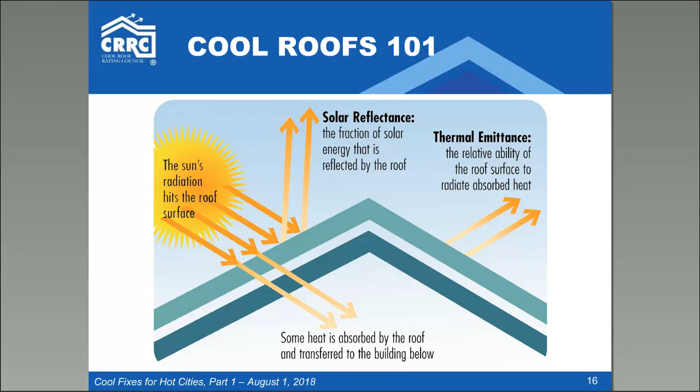And so then we look at the thermal emittance, which is the ability of the material to re-radiate that energy back out into the environment. And so what isn't reflected and what isn't re-emitted back out into the environment, that's the energy that's going to be absorbed by the building. So that's really key that we look at these two properties as a way to evaluate how much of that solar energy is going to be transferred into the building and absorbed by the building, and that's something that you're going to have to address with air conditioning, sort of additional cooling load.

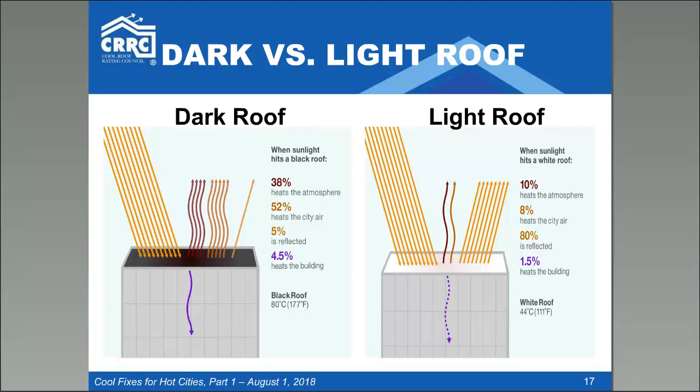So just a couple illustrations of this concept here, just another sort of way of showing the same information. You look at a dark roof, some of that energy is still reflected, but much less than a high reflectance light colored roof. So you still see the same amount of solar energy is coming in, but a lot more of that energy is going to go into the building compared to a light roof where a lot more of that is bounced back off and re-radiated into the environment. And that results in a lower temperature of the roof and then less of that energy that is being transmitted down into the building.

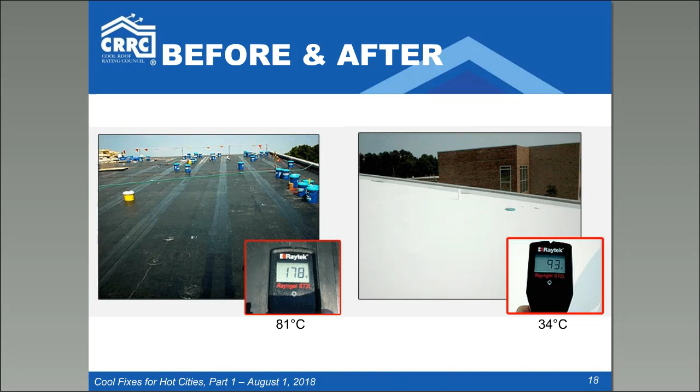And here's just another sort of quick example. This is basically an anecdotal thing, but you can look at the measurements being taken by a thermometer on the roof when it's in construction, and it has a black underlayment, much higher temperature at 178 degrees Fahrenheit or 81 degrees Celsius, and then the finished roof product with the light colored one results in a much lower temperature. You've got 93 degrees or 34 degrees Celsius. I'm actually not sure where the location was of that, but it seems like it's pretty hot given that 93 is the cooler temperature of that building.

So that's just sort of some basics of the properties that we're looking at, but let's talk about the impacts of it. So I mentioned occupant comfort, which is something that, here in America, we might be thinking more about air conditioning. You got your utility bills, you've got the amount of load that's being placed on your electrical grid. But in some parts of the world, people don't have air conditioning, or they are looking to add air conditioning, which is something that strains the development of those countries. So people who live on the top floor of buildings, their apartments might be a lot hotter, and that could have some health impacts as well. So occupant comfort is definitely a key consideration as well.

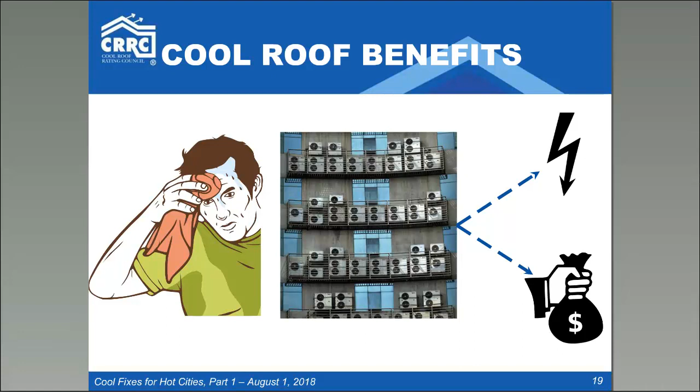But also, like I said, you have air conditioning. If you're running your air conditioning all the time, that's going to be a lot of money for you as the homeowner, and also taxing to the electrical grid of your community.

So that takes us to the urban heat island concept. At its most basic description, the urban environment has a lot more dark surfaces, has a lot more thermal mass, a lot of asphalt and concrete materials that are going to absorb the heat throughout the day. And as that happens, it heats up higher than other environments that might have different surfaces, less development. So you end up with an urban heat island. The urban area gets hotter and it stays hotter. It doesn't cool down as much in the evening. And this has a number of considerations for the local environment.

You have increased pollution happening at those higher temperatures. The reactions that create ground level ozone and smog happen faster and more at the higher temperatures. It's also just sort of less pleasant. If you're in a hot downtown area, you're going to have to be running your air conditioning more than if you're in a less developed area.

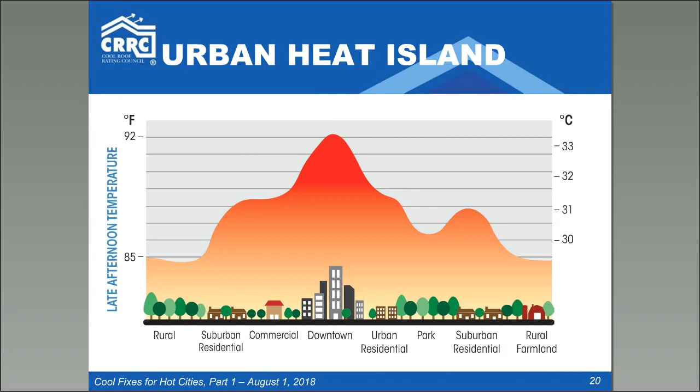And so there's a lot of considerations around the urban heat island, so cool roofs not only impact your building and your energy use and the cost that you're spending on air conditioning, but also have a bigger impact on the community around you.

So I want to actually pivot really quick to talk about something else, which is the winter heating penalty. I think it's pretty well understood that if you live in a hot climate, keeping your building cool is going to be helpful. But what if you live in a more moderate climate? How do you tell if that cool roof is going to be helpful for you in the summer, or are you actually losing out on some energy in the winter? This is a real phenomenon, but I think generally it is overstated. There's basically a couple different reasons why.

In the winter, the sun is lower in the sky, so not as much of that solar energy is making its way through the atmosphere to the building. Also in winter, you've got shorter days, so there's less total sunlight, and depending on where you are, oftentimes winter days have more cloudy or overcast weather, so you're cutting back on the amount of solar energy. And lastly, if it snows, you already have a white roof, so the color of the roof underneath basically doesn't matter anymore.

So all this is to say that in the summer, you're going to have some gains from keeping your building cooler. And in the winter, you might have to heat your building a little bit more than you would with a traditional dark roof. But the relative difference is much different. The gains in the summer are much more than what you're losing out on in the winter, because there's not as much solar energy getting absorbed by your building in the winter as what you're avoiding in the summer. My rule of thumb is if you use air conditioning, then you'll probably benefit from a cool roof. But that's just a quick rule of thumb. Obviously, there's a lot of variables that go into your location and the type of building that you have.

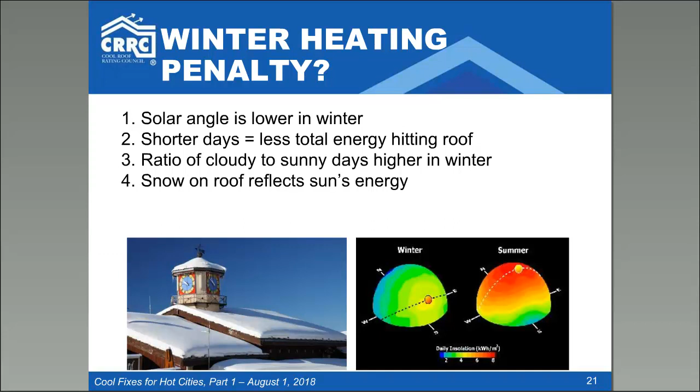I think this is an important concept because it helps people understand that cool roofs are beneficial in a lot of different climates. It's not just the San Antonio area, which we'll be talking about today, but there's a lot of other areas of the country where cool roofs can still be beneficial.

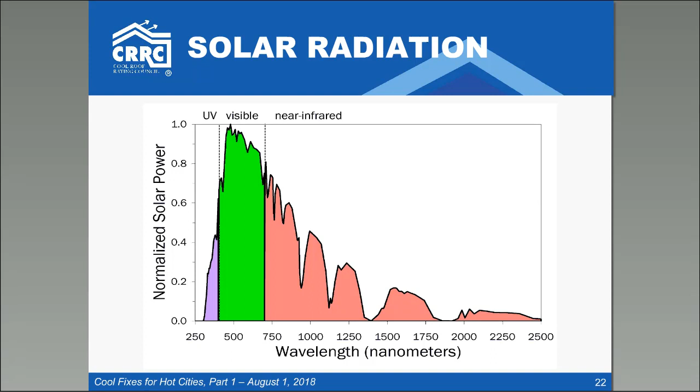So don't get overwhelmed by the science here. I just want to give a quick illustration of the solar spectrum. You've got visible light here in the green, and then you've got the UV light and the infrared spectrum on either side of that. This is just a graph of some material that's reflecting energy in different ways. The reason I want to understand this is because this really gets into some of the interesting things happening with cool roofs.

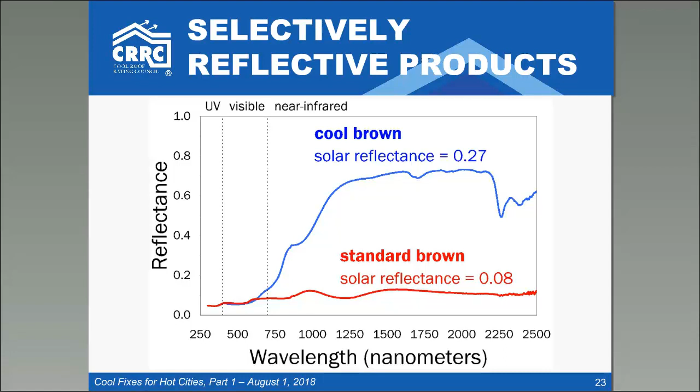So you're not going to be able to see any difference. Obviously, there's a little bit here at the tail end of the visible light spectrum that's maybe a little different. But it's basically going to be the same color as the standard brown, but much more effective at reflecting that solar energy. So that's really interesting, that cool roofs don't just have to be white. There's a lot of different options for cool products using technologies like this. And just to further that illustration, here are some examples of different materials that have been coated.

So in this case, the R is the solar reflectance value. So you can see that the black is 0.04. So these numbers would go from 0 to 1 as sort of a ratio of how much of that energy is being reflected. So a standard black is 0.04. That's pretty close to 0. But a cool black is actually 0.41. So that's almost 40% of that solar energy being reflected back off.

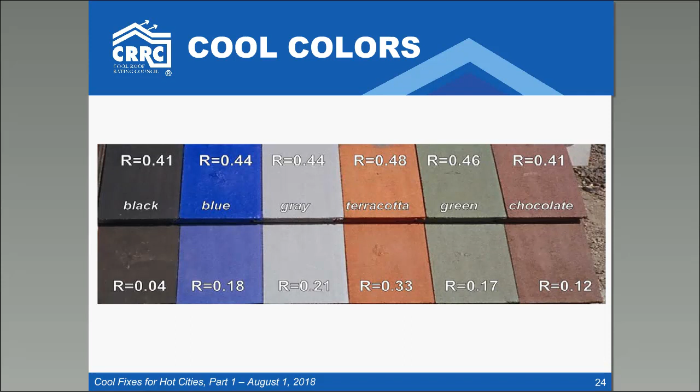And it looks more or less the same. You can see a little bit of color difference, but fairly close. So that's an interesting way of demonstrating the power of cool colors and technology to keep buildings cool while not sacrificing on the aesthetics of your building.

So in the next few minutes, I want to briefly talk about the CRRC rating program. As I mentioned, the ratings are a key component of our organization. We take samples of materials, have them measured for their initial values, and then we put them out on weathering farms in 3 different climate zones around the United States: Ohio, Arizona, and Florida. After 3 years, we bring those back and measure them again to get the 3-year weathered value.

And so that's more representative of how that roof will perform over time, right? How the roof performs at the beginning is nice to know, but your roof is going to be on your house for 10, 15, 20, 50 years. So being able to understand how it performs over time is going to be more useful for your benefit. So we definitely want to have those 3-year values in addition to the initial ratings.

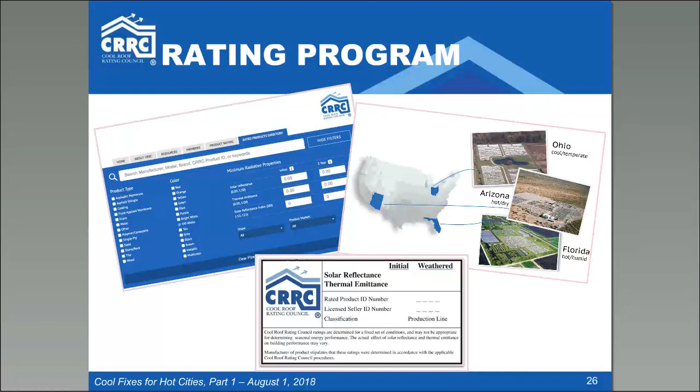And then we provide labels for those products so they can be clearly identified as being part of the program. And then we post all the information on our online directory. So if you go to coolroofs.org/directory, you can go straight to our site that has about 3,000 different products, and you can filter and sort through them. So I'll just jump into that here.

So you can sort by product type, you can sort by color, and you can also specify a minimum value that you're looking for in solar reflectance or thermal emittance. And that can be useful in determining compliance with specific programs or local codes.

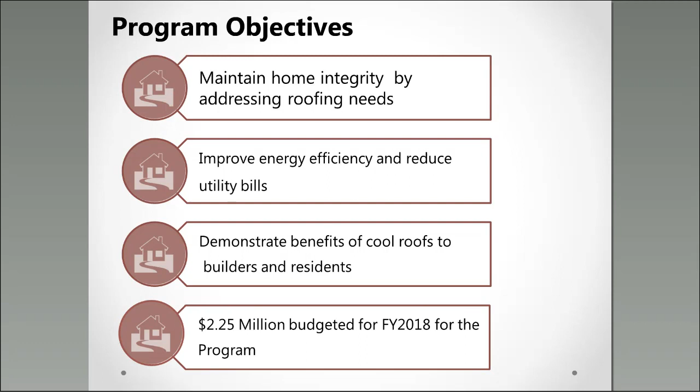One that I want to mention that we recently learned about having high reflectance roofs and creating a home that's comfortable: we received information about the fact that a cooler home actually helps to lower domestic violence rates. So the benefits keep layering on and on with doing and building homes in the most efficient and proper way.

So as a city official, as somebody that's looking to try to find a way to provide quality of life and improve the situation for many folks in San Antonio, this is something that's very important to me. And you can see that what we're trying to do is educate folks throughout San Antonio and anywhere in South Texas, all over the South for that matter, about this benefit.

So I would want to also point out that I'm very thankful to have a city staff that has been very, very cooperative in helping to establish this program. When we started the program, we started with only $200,000. That $200,000 got us 11 roofs, basically just to get it off the ground and to prove this as a pilot program.

We know that once we can demonstrate the program through real projects, we can show those benefits to the rest of the city. And so this program has grown from just my council district, which is the center part of San Antonio, all throughout the city of San Antonio now.

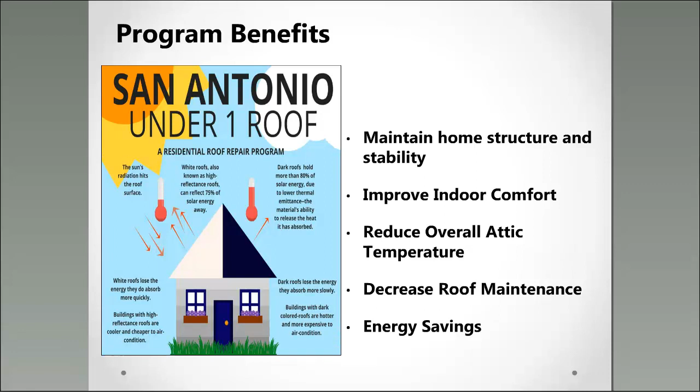So again, this is just something that we think is an important part of what not only San Antonio is going through, but many cities are going through. And at the heart of this is we know cities have to find ways to create and administer programs that can help their communities much quicker and more effectively than state or federal government can. So with that, I want to hand off to Barbara Ankamah. She's going to speak a little bit about the program.

Thank you, Councilman Treviño. We in Neighborhood and Housing Services share in Councilman Treviño's excitement about the program. When the discussion came up about funding this program, we quickly got together as a team to really talk about, okay, how are we going to qualify people? How are we going to market this program and really make sure that we expended all the funding that he secured through our general fund to deliver this really great benefit to our residents?

But the really unique thing about the Under One Roof program: we receive CDBG and HOME funds to do owner-occupied rehab, so a lot of our focus is addressing the whole house. And this is very singular in focus with addressing the roof, but a really neat piece to this is it allows us to help clients that otherwise most likely would not be helped through our other programs because they may be over income or may not meet those federal requirements.

Councilman Treviño, one thing that he really stressed is, look, I want to help our veterans, I want to help our seniors, and so we have made it a point to definitely target those areas that we know veterans, seniors, people that meet the qualifications for this program are at.

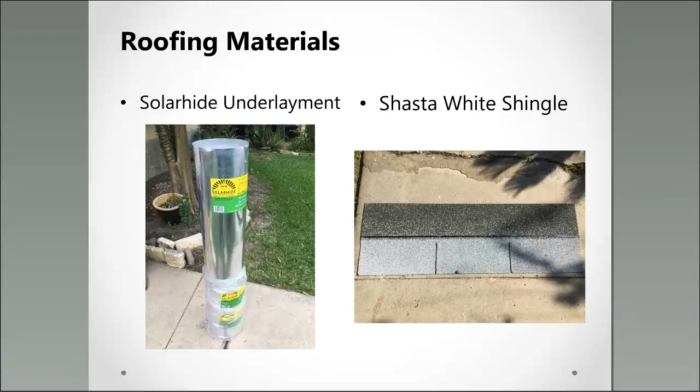So the roofing materials, we're using a Solarhide underlayment in addition with the Shasta white shingle. So when you drive through some of the neighborhoods, especially when we initially started in District 1, we had some targeted neighborhoods, and we really did work to cluster the homes that we're assisting and doing our best to qualify people in close proximity. So we have some streets that have 4 or 5 homes that we've done. Might be spaced apart, but you can clearly see those white roofs, and so we're quite proud of that. Makes for a good tour to really point out those roofs and see the benefit at work.

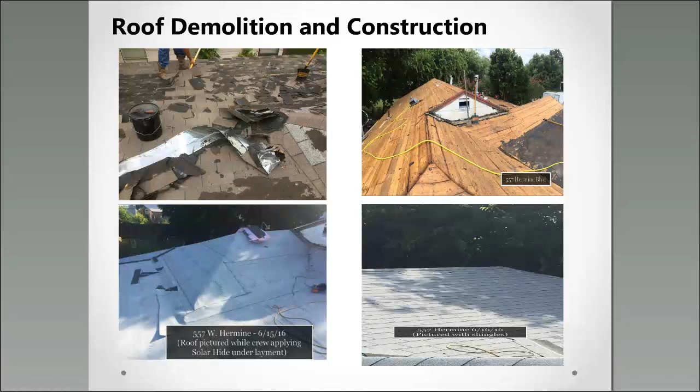We've got a size requirement. The home cannot exceed 1,500 square feet. We have exceeded that. That just was to sustain some sort of efficiency with costs. Again, as we moved out into other districts, we encountered some districts have larger, older homes, and so we did accommodate for those requests. We didn't want to turn people down.

Our timeline, we're aggressive because, again, this year our goal was to spend $2.25 million, and we're almost there. So as you see in those first and second quarters, we completed 85 roofs, third quarter 42, and fourth it states 5, but since this presentation was handed in, we've got 9 more additional roofs that have been completed. So we have an aggressive performance measure to complete 161 roofs for this program. We're at 141 to date.

Our challenges. So initially when this program started, residents really didn't believe they were going to receive a free roof, let alone an energy efficient roof. So we would get one person, we would do their house, and then quickly be accosted by the neighbor saying, well, why aren't you fixing my roof? Well, we block walked, we handed out flyers, and then they admitted, I really didn't believe it was real. I just thought, oh, there's a gimmick to it. I surely owe something. But again, this is granted to the homeowner.

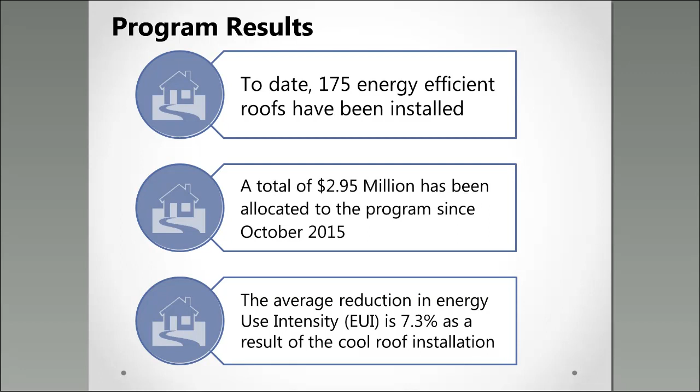So program results. Here it states 175, but we are actually now up to 184. A total of $2.95 million has been allocated to the program since its inception in October of 2015, and the average reduction in energy use intensity is 7.3% as a result of the cool roof. So it really has been so beneficial and so great. It's a great piece to talk about when we talk about housing programs. It gives us more options to assist our residents, which makes us highly excited and happy.

And I just forwarded a little too fast. But here are some before and after pictures of 2 homes that we did initially when we started, and you can see that bright gleaming white roof. And they're all happy residents.

I want to also mention that, as this program evolves, we're always looking to improve. It's been maybe a year now that we had a really, really bad storm hit us, and roofs were damaged. And so one thing, we don't require people to have homeowners insurance, because sometimes that is a lot for people to afford. So if you don't have it, that doesn't eliminate you from receiving the assistance. But if you do, we get copies, and we make sure, if people have filed claims, that's well documented. And again, it's just protection.

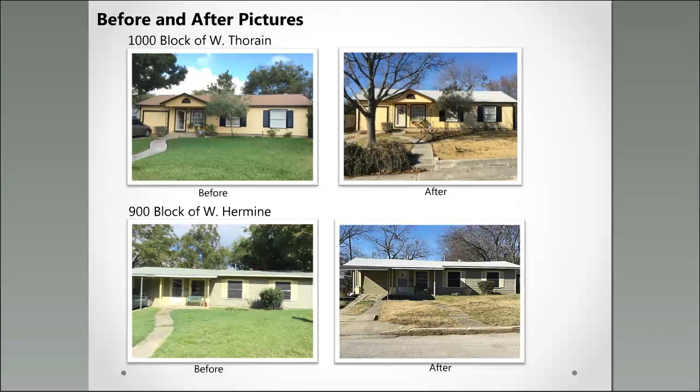We don't want those that may have the means to address their roof taking advantage. So we've got some things in place to just make sure we're helping those who need the help and the assistance. And again, if you look at the houses that we're addressing, they're houses in fairly good condition, because if there's substantial issues like foundation and other things, we refer them to another program that can address their issues. So that concludes my presentation.

And I don't know, Councilman Treviño, if you have any closing remarks. Well, yeah, I would just add that, number one, I want to thank all the hard work of Barbara and all the people over at Housing and Neighborhood Services, because as she mentioned, they are working on overdrive to make this program a success. They need more help, and we're working very hard to get that in our budget for this year, because we want to increase the amount of capacity that we get done for our city.

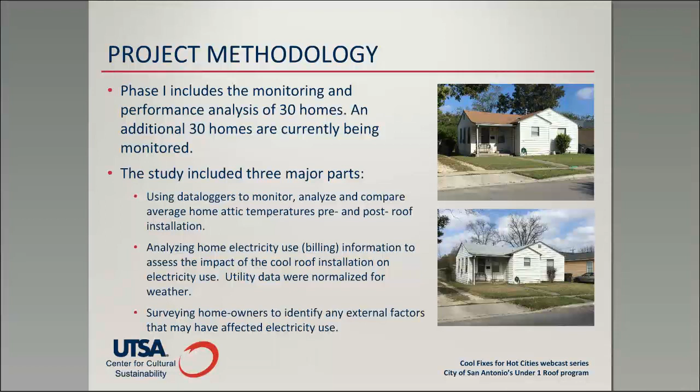We went and interviewed each homeowner, and our intent was really to identify their energy use patterns and more specifically to see if there are any other external variables that may have impacted their energy use patterns post-roof replacement that we need to be aware of so that it does not affect the accuracy of our results.

So if I jump directly into the results, the first result that I want to share with you is the results of the attic temperature analysis. So when we did the attic temperature monitoring, we decided to divide our work into 2 parts. So we looked separately at homes that were installed during the summer versus homes that were installed during the winter.

And the reason we did that is probably something that you've already heard about, which is that the impact of the material will vary in summer versus winter. And while we expect positive impact in summer, there was the potential of also negative impacts in winter because of heating needs. So we wanted to make sure that we capture that.

Like I said before, we installed a data logger in every home. We then kept that data logger for as much as possible before the roof replacement. The period varied slightly depending on construction schedules and homeowner availability, but on average, we got between 10 days and 2 weeks pre-roof replacement, and then we kept it after the roof was replaced for probably at least about a month.

We then collected that information, and we collected also concurrent outside weather information from a nearby weather station. We were about a mile or a couple miles away from our airport, so that was not a big problem.

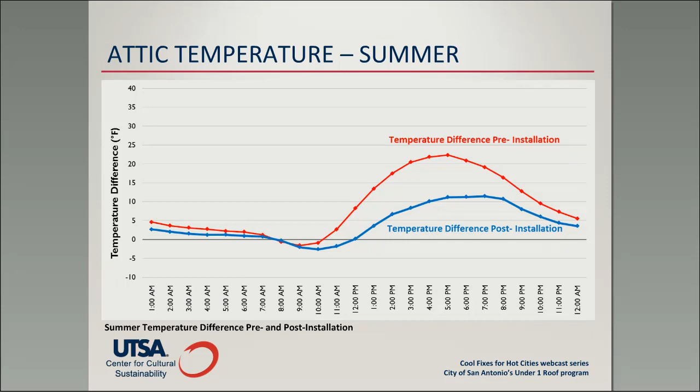So if we just specifically look at the two average profiles, I think you can clearly see again the positive impact that installing the roof had on the attic temperatures. We got a reduction of, in some cases, 12, 13 degrees on average in the peak daily temperatures, which is really a significantly large impact that would positively impact both the energy use and/or the thermal comfort of the occupants. And we believe that that was due to the new roofing material.

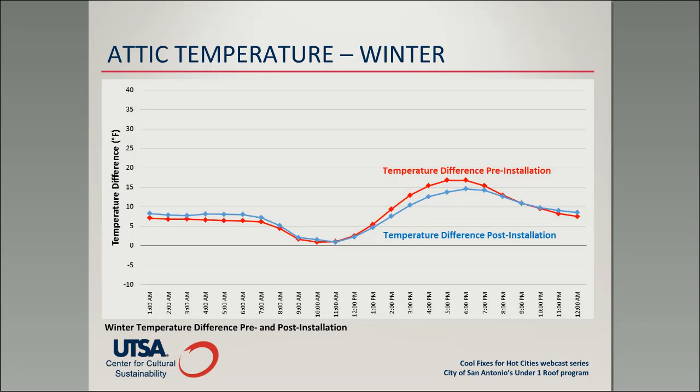But if you compare the average profile, you see that in winters, the impact of the roof is much less, for the reasons that Jeff has already described, and as the councilman mentioned also, our winters in San Antonio are not really that extreme, which was a very positive result because that indicated that the new roof would not have a major negative impact on heating energy use in San Antonio, which is, to begin with, not that large in the overall context of the energy use of the home.

So if I move to the second part of our work, as I mentioned, in the second part of our work, we looked directly at utility bills. So for each one of the homes, we collected utility bills for at least 1 year before roof installation. In some cases, we managed to get more than that. And at least 1 year after the roof replacement, we collected that information from our local utility company, CPS Energy, which have been incredibly helpful in the project, and we greatly appreciate that.

After we got that information, we inputted the information into the EPA's Portfolio Manager, which, if you have not used before, is an excellent tool, a very helpful tool to use. So through Portfolio Manager, we achieved two things. We first aligned our utility billing information with calendar months, so it became much, much easier to compare them. But much more importantly, we normalized the utility data for weather differences.

What that means is when you had utility data, in this case, before the roof replacement and after, you're not really sure if any difference between them was affected by the year after roof replacement, for example, being more hot or less hot, or the winters being too cold or less cold.

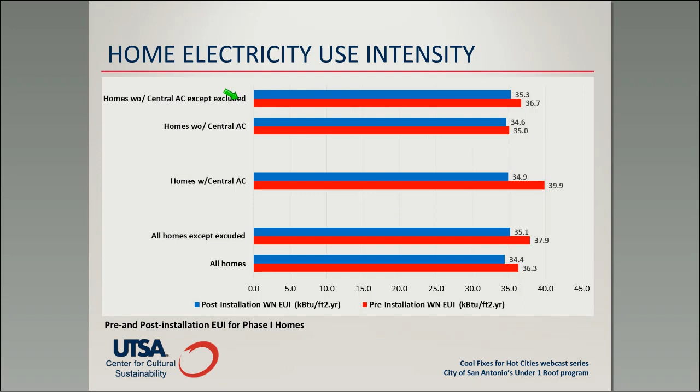If you look at the homes with central AC, the reduction was larger. The reduction was about 5 kBTUs per square foot per year. The reduction in the homes without central air conditioning was somewhat less. It was about 1.4 kBTUs per square foot per year.

If we look at the same numbers as a percentage, which is probably a better way of looking at it, you can see that again, the overall sample showed a reduction of about 7.3% in the electricity use intensity. Homes with central AC, as we expected, showed a larger reduction of 12.5%, while homes without central AC, and again, some of those had window units that were turned on at least for some parts of the time, so it's not that they're without cooling completely, but these homes showed an average reduction of about 3.9%.

So in general, all of the groups that we looked at showed an average reduction in electricity use intensity after the roof installation compared to before roof installation.

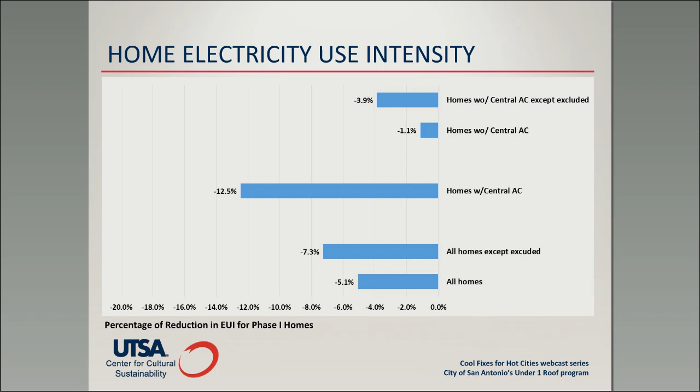So in summary, I think the results of the first phase of our work show a clear positive impact of the new cool roofs certainly on the electricity use of the homes, but also on the thermal comfort. So even the homes that don't have their AC on all the time, we expect have witnessed an improvement in their thermal comfort conditions by the reduction in their attic temperatures. And I think these results demonstrate the success of the program in improving both thermal conditions and energy use in the homes.